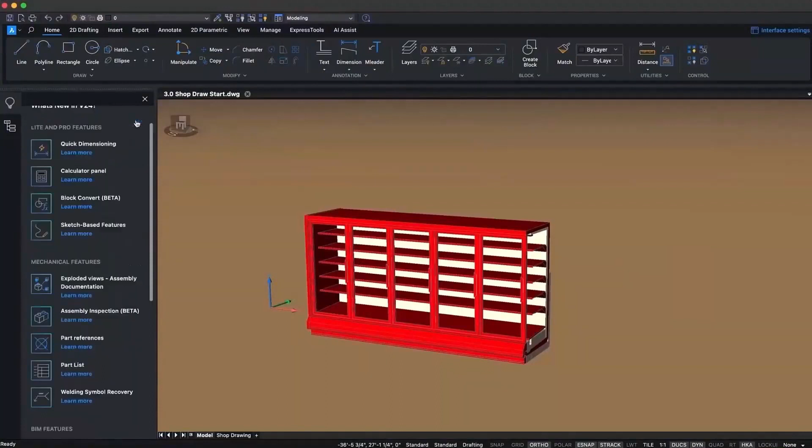The ribbon has been redesigned with the guidance of AI Assist, user data, and lots of feedback coming directly from you. It brings an improved, modern, and simplified look with more convenient icon spacing.

If you still can't find what you're looking for, you can just type it into the search bar and it will take you to the right location.

Now you're always in control of your drawing environment, so you can switch off the modern layout, refresh, and go back to the classic experience right here using the new interface settings dropdown. We also implemented a much requested quick calculator, which allows for fast and accurate maths calculations directly inside of BricsCAD.

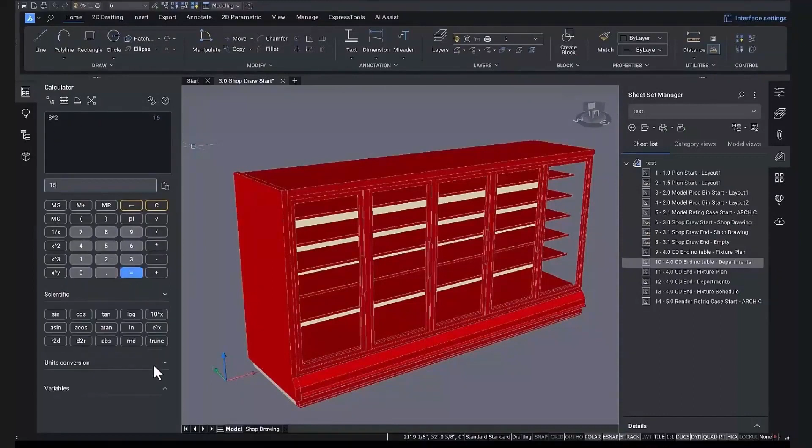We're so excited to see how these features and updates will make it easier for you to learn, use, and adopt BricsCAD. As you can see, we're working hard to make BricsCAD modern, simple, and easy to learn. Let's take a look at BricsCAD V24.

When you start BricsCAD, the launcher allows you to pick the workspace for the current task you want to perform. Let's open the drawing we're going to start with for our 2D floor plate layout.

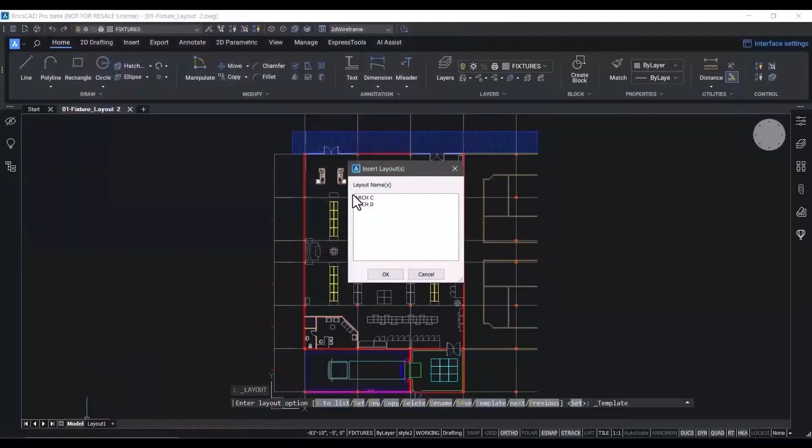As usual, you can select template files, apply them to your models and your layouts to ensure that your drawings meet your standards. New to V24 is the ability to directly create new drawings from a template from the start page.

Now, the BricsCAD Layout Manager also assists you in adding, removing, renaming layouts directly from that tab, and also has the ability to publish selected layouts using all of the output functionality of BricsCAD. You get very fast, one-click access to those tools.

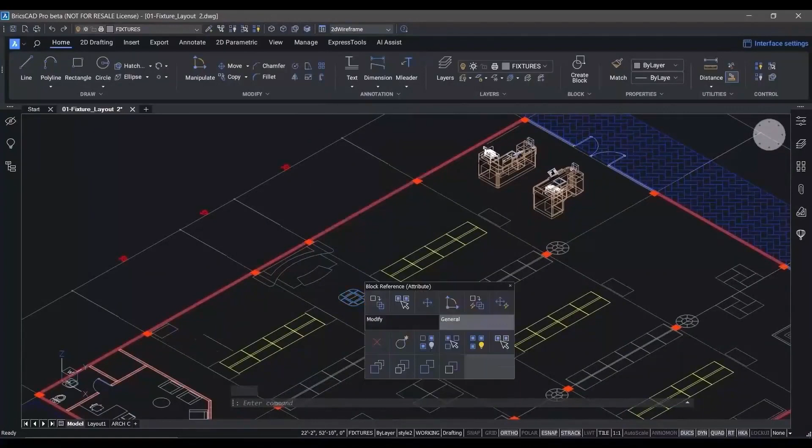Speaking of one-click, the ability to have the commands you need at the point of work without any typing, no ribbons, and no toolbars—that's the BricsCAD Quad Cursor. We've improved it greatly for V24. The Quad Cursor is context sensitive, so depending on the entities you hover over, the quad will display the requisite commands that can be used with those entities. Of course, at any time, you can always type a command in at the command prompt and use the muscle memory that you already have.

Speaking of commands that are, well, commandless, the manipulator allows you to select entities and move, copy, rotate, and mirror them directly with no command input. And the nearest distance command in BricsCAD accepts a typed-in dimension as an override to apply a move between any two entities.

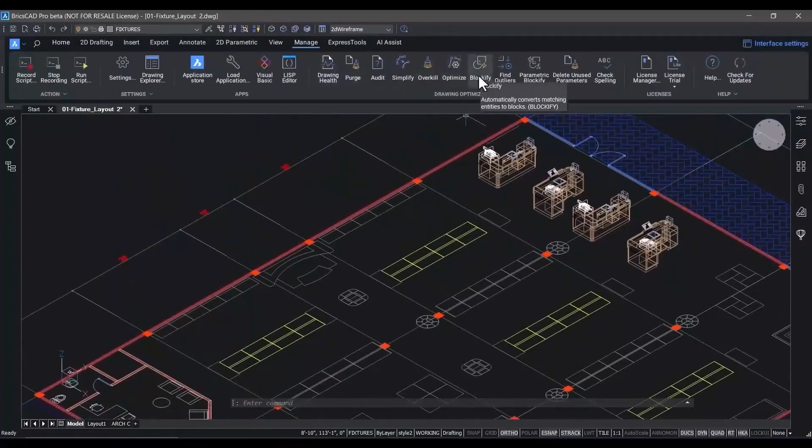Now, in the layout of the 2D floor plate, we used a combination of geometry and blocks. You probably know that blocks are the most effective and efficient ways to represent repetitive geometry in your drawings. But sometimes it's hard to remember where you created those, or to create them in the first place. The Blockify command in BricsCAD has undergone some great enhancements for V24. Here you see us using Blockify to match geometry with other similar geometry in the drawing, and it allows us to easily create blocks to represent that repetitive geometry. This reduces the size of our drawing files and makes it easier to load and work with those drawings in BricsCAD or any other CAD program.

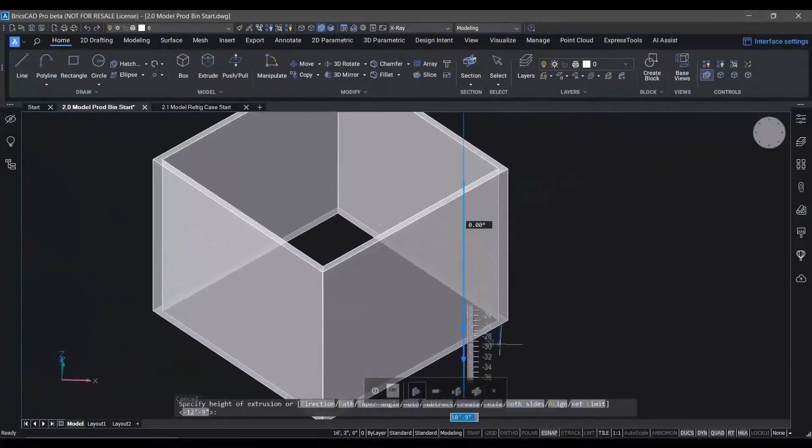Everything you learned about drawing in 2D can help you move to 3D with BricsCAD. Our unique direct modeling allows you to simply select faces and boundaries and then push and pull the geometry. All the 2D moves you know, from sketching through extruding and creating new geometry, are simpler in BricsCAD because it's one environment that lets you work in both workflows simultaneously.

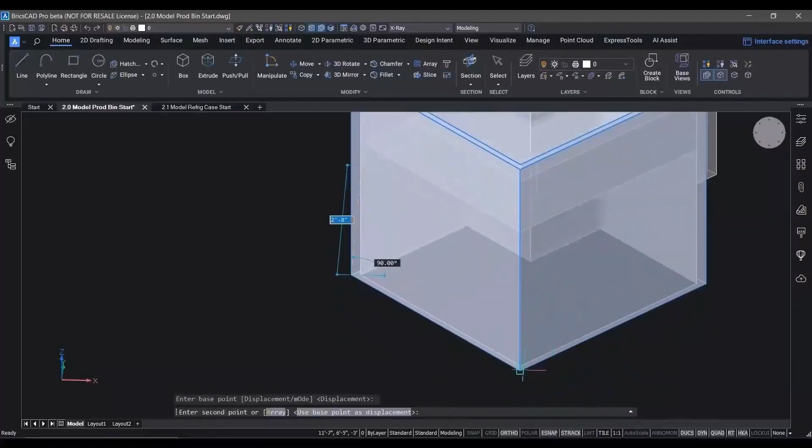We've created one example of this produce bin, which we're going to add into our library parts. Now we'll simply copy it to produce the quad bin that we're going to use in the final library component. Then we'll switch on some layers to show you the outer surroundings that we've created separately for this produce bin.

This same paradigm of using a sketch in 2D and then using it to create 3D geometry works for just about any shape you can imagine inside of BricsCAD. And here's the 3D representation of our 5-door refrigerator case for the store planning exercise.

Now that we've placed all of the 2D blocks in their proper orientation on the floor plate, we're going to use the block replace workflow within BricsCAD to simply swap them out for their 3D equivalents. If the 3D parts have been modeled and exist in your library, tools like Block Replace can help you move from 2D to 3D faster and more accurately. Once we have the 3D model, it's very easy to do visualizations and advanced calculations on the way things fit together within the space.

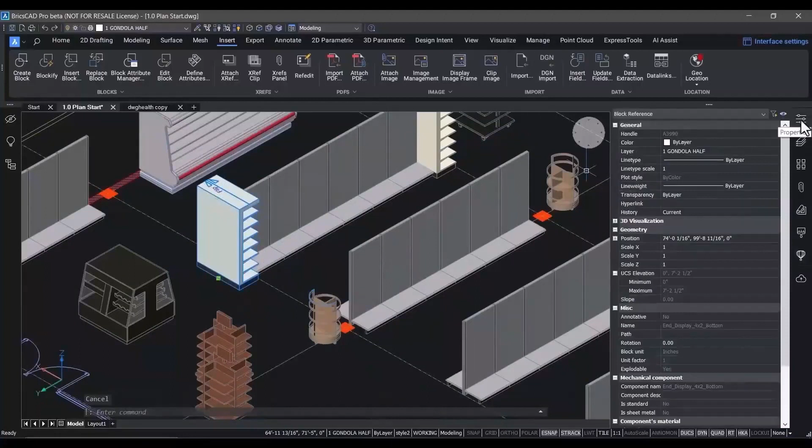Now we'll insert a parametric block created in BricsCAD directly from our library to place an end cap on the end of one of the shelving units. We're constantly improving BricsCAD parametric blocks, and there's a lot of great new features in V24. For one thing, it's more visual—do you see that flip line? You can see that a parametric block can contain a variety of different states that allow you to represent it as required in various drawings.

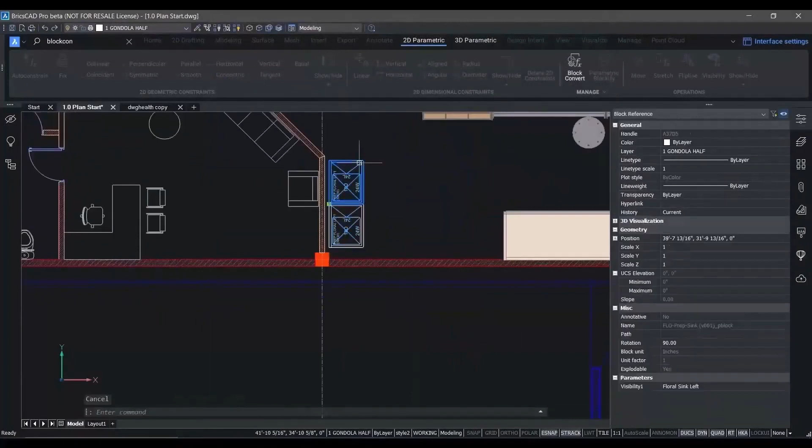Here are a series of dynamic blocks created in another CAD product. Whilst these blocks work perfectly in BricsCAD and can be used in all their iterations, they can't be edited. That's why we created Block Convert. In V24, we've consistently enhanced and refined Block Convert to accept dynamic blocks from other programs and immediately convert them into BricsCAD-style parametric blocks, so that you can edit them inside of BricsCAD's block editor. Here you can change the visibility states, cycle through all of the available parametric actions, and add and remove those parametric actions as you need from your blocks.

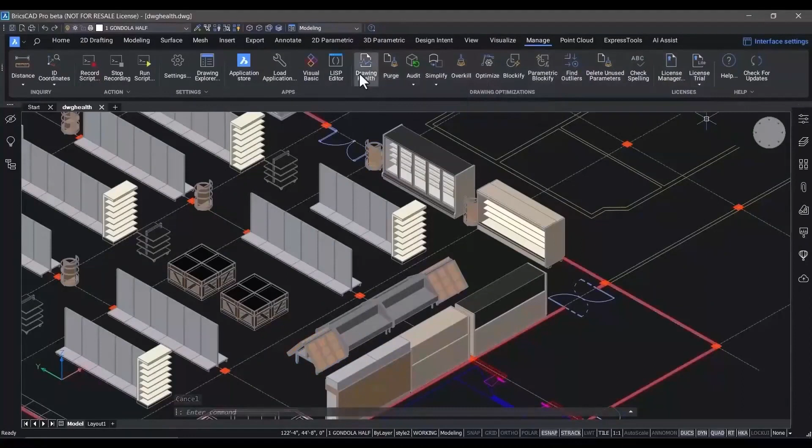You may find that even when blocks are included in libraries—for example, the produce bins we're working with here—we can see by hovering over them that the tooltip says an incorrect version of these blocks has been used. This is not a problem. The drawing health management workflow in BricsCAD has been improved again for V24. It now incorporates Overkill, which allows you to select geometry in the drawing that's duplicated and simplify it, or in our case, to select duplicate block definitions that have different names. This ensures you remain in control and gives you the ability to quickly rectify each of these insertion situations within a single operation. The drawing health tool is automated, not automatic.

You have full control over what gets modified. At the end of the drawing health run, the command generates a report to show you all the changes that have been made to the current drawing.

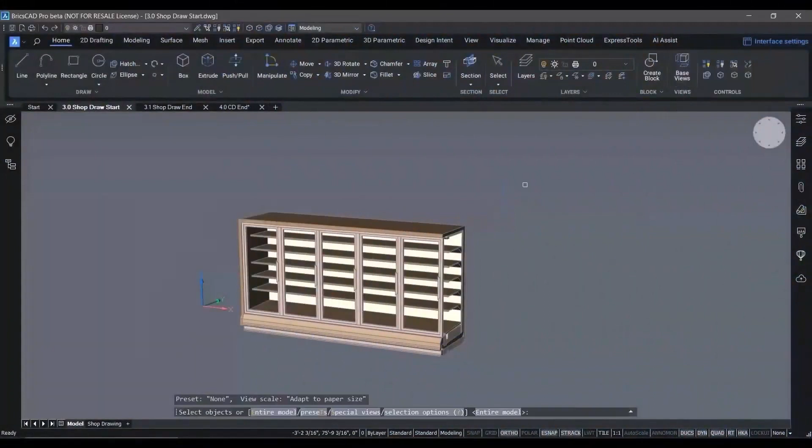Now let's start to lay out some drawing views of our 5-door refrigerator cabinet. We need some shop drawings that will be used to finish the assembly of these cabinets and prepare them for installation on the floor of the store.

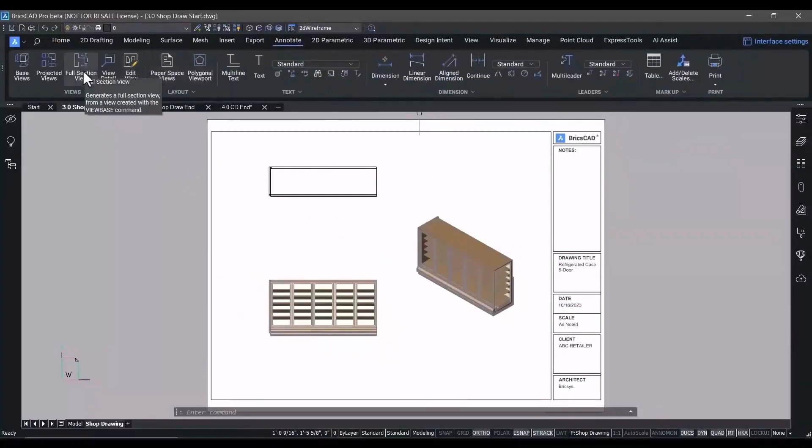We're going to use the ViewBase command to create our standard drawing views very quickly from that 3D geometry. We have full control over the way that each of those views are depicted in the Properties panel. Earlier you saw how easy it was to go from 2D to 3D. Now we're showing you how easy it is in BricsCAD to go from a 3D model to a 2D drawing that's fully associative to the model. When the model changes, the drawing will update too.

You have the ability to quickly create a section view and create circular or rectangular details just as easily. In V24, we've improved the performance of generated drawing views in BricsCAD to help you get the drawings you need out of your models faster, whilst maintaining the accuracy you need.

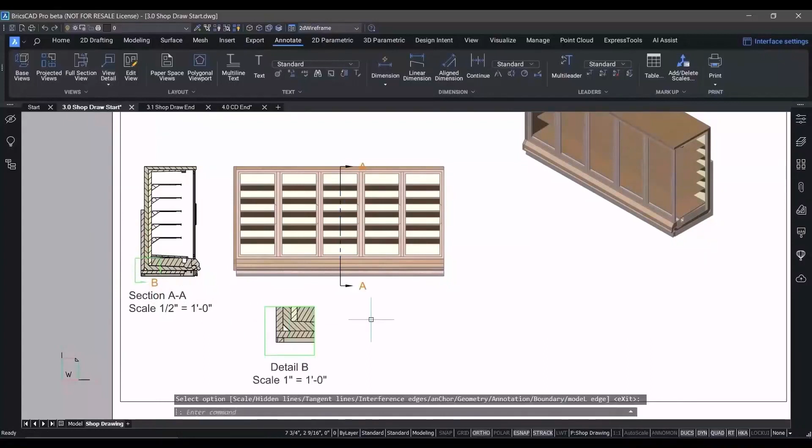Next, we want to add a parts list to this drawing to call out the various components of this refrigerated case. To do that, we'll use multi-leader entities to point to all the individual parts and pieces making up the equipment. We're going to use this drawing on the shop floor to help the team assemble this cabinet.

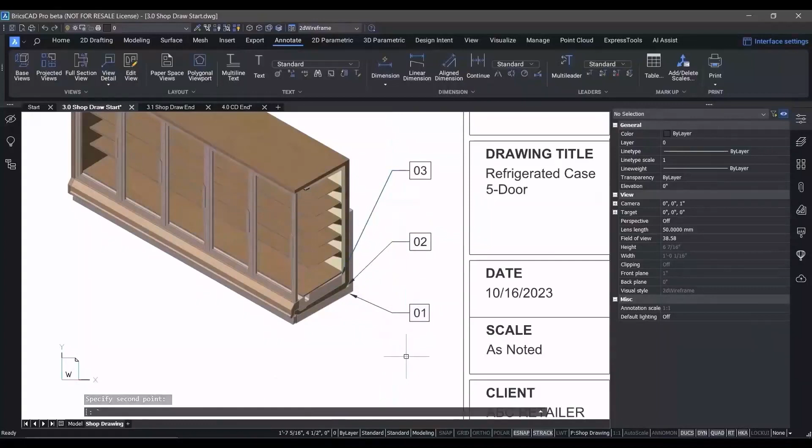You notice that we can select these multi-leaders and change the way they're depicted very easily from the Property panel in BricsCAD, with all the functionality and capability you'd expect from this common entity type. The multi-leader align command makes quick work of lining them up in our drawing. Now we'll close out the rest of that sequence and show you the rest of the multi-leaders in place.

Now we're going to import data in a table from Microsoft Excel. This is something that you've told us you do on a regular basis, so to make it easier for you, we've added Smart Cell copy and editing to BricsCAD V24. This is the ability to import an existing spreadsheet, create a table, and then easily modify and edit the table by adding, removing rows, and copying data between the rows and columns in that table.

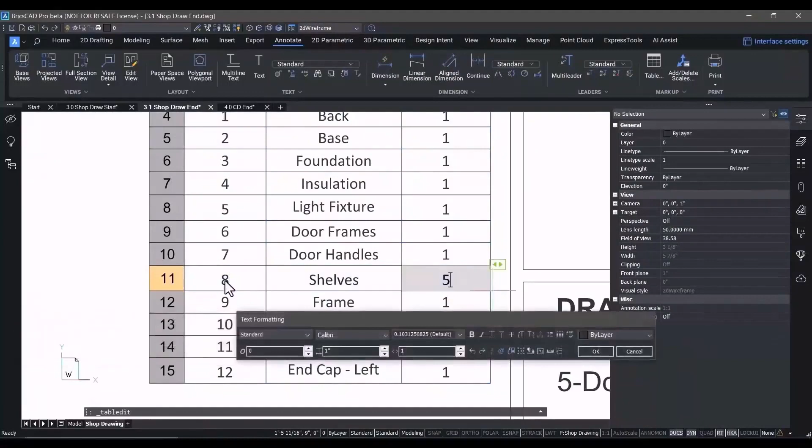These types of functional enhancements make it that much easier and quicker to deliver the documents you need to deliver in order to get work done and get paid.

You may have noticed that we added a row to our table. Let's add the requisite leaders here, but we want to point to all 5 shelves. So we'll simply use a multi-leader with multiple arrowheads to those 5 shelves. And voila, our shop drawing is generally complete.

Another thing you asked for is behavior that's consistent with other CAD applications. In BricsCAD V24, the trim and extend commands automatically highlight geometry to show you what your options look like. It's that easy. And once you've gone in and completed the geometry modifications, you can invoke a new command in V24, QDim.

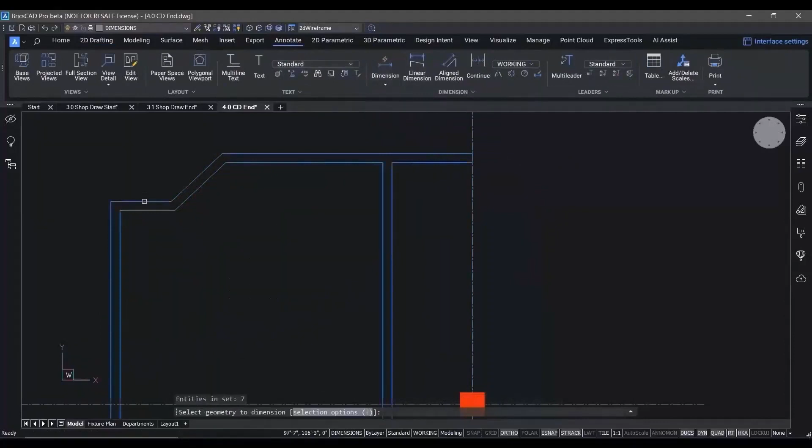QDim lets us place linear dimensions very quickly within a drawing. These dimensions are all easily modified to meet your standards and the placement requirements for individual drawings.

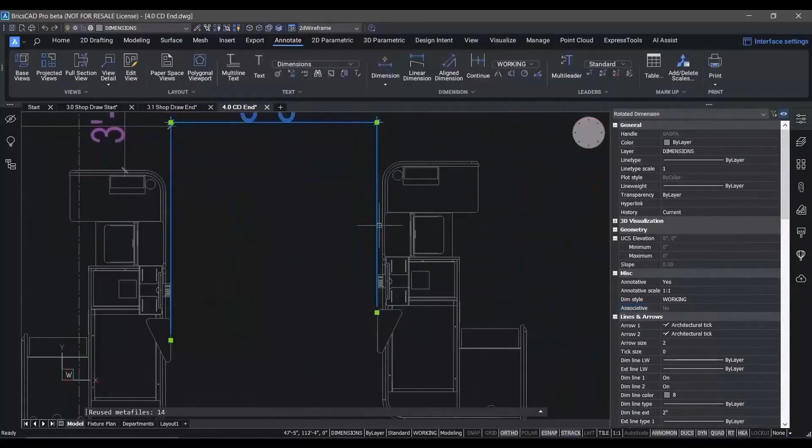Another area where we've improved the performance of BricsCAD V24 is around associative dimensions. The Anno Monitor system variable adds a small glyph that shows associative dimensions that have lost the connection to the geometry that defines them. So whenever the Anno Monitor flag comes on, we know that that particular dimension value doesn't match reality, and it allows us to modify the geometry or modify the dimension as required so that they're correctly shown.

In V24, we've also completely revamped the BricsCAD Sheet Set Manager, including new multi-user access to DST files. We have a new Model View tab that allows us to extract model views from any drawing and paste them into a layout really easily.

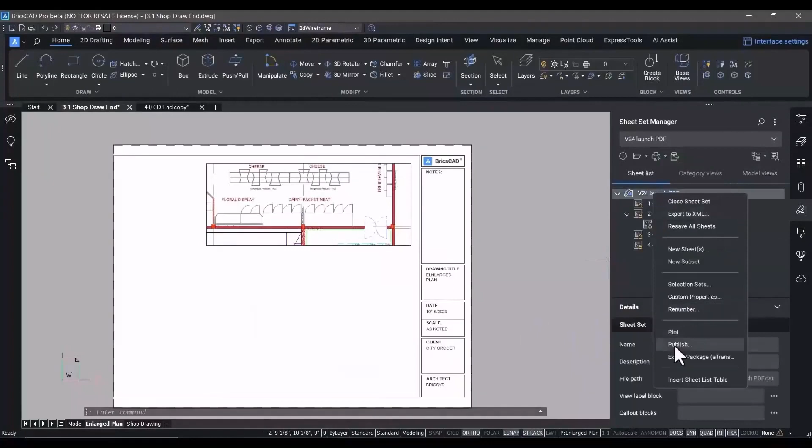Once we've done this, you'll see that we also have the ability in the new Sheet Set Manager to publish directly from the sheet set, which gives us the ability to quickly create, in this case, PDFs, including, and this is new to V24, bookmarks in those PDFs so that it's easy for you to hyperlink to the individual sheets in the PDF file.

Another user request was the ability to output standard raster file types with full control over size and DPI. Now in BricsCAD V24, this is directly available in the print and publish dialogues. As you can see, we can quickly generate raster file output for whatever type of documentation needs you have.

And that's just the start of what's new in BricsCAD V24. At Bricsys, we work every day to deliver a familiar and compatible CAD experience, build innovative ways to help you get your work done faster, and to build a modern and accessible user interface and user experience for everyone.

Want to see more about BricsCAD V24? Watch these breakout sessions, including a session on our unique drawing health management workflow and the new BricsCAD parametric block workflow with Block Convert, which has been greatly enhanced for the V24 release. We're super excited for you to find out more about our products.

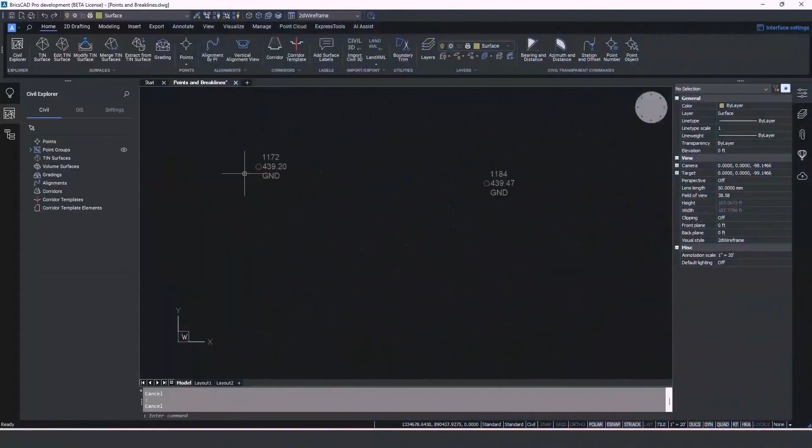First, we'll show you a few of the highlights of our TIN surface creation and editing capabilities. BricsCAD V24 has made working with TIN surfaces easier than ever, with a UI that's more intuitive and easy to learn. You can select the group of survey points and create a TIN quickly and efficiently, and maintain visibility into how that TIN was created.

You can edit parameters such as edge length so that your TIN is as accurate and efficient as possible. You can use the new transparent commands to enter data in common civil survey formats, using this to do, for example, break line data, whether this is specifying civil point numbers or snapping to any part of a point object.

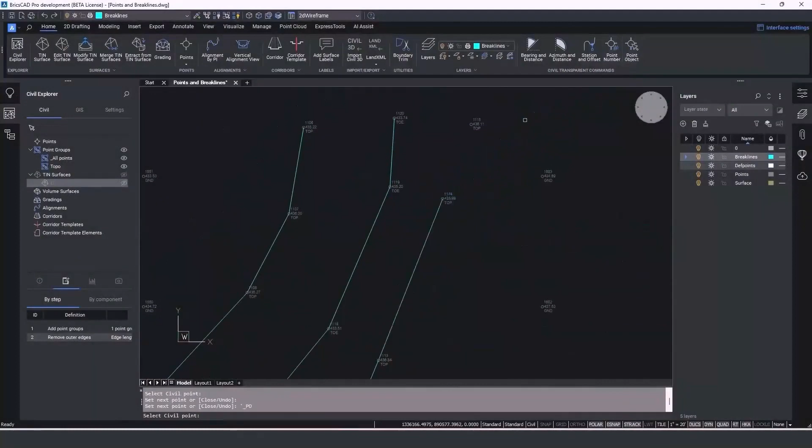Once your break lines are created, adding this data is quick and easy, with immediate surface updating, and the ability to use the Properties panel to update any civil points that may be incorrect.

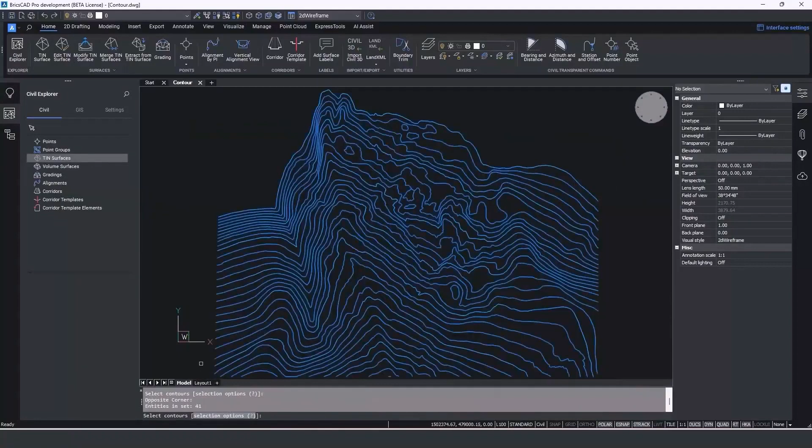At times, contour data is the only data you have available from which to build your tin surface. As a result of user requests, in BricsCAD V24, we've added the ability to create tin directly from contours, instead of treating the contours as break lines. This allows us to minimize flat areas typically created by contour data and greatly increases the accuracy of the tin surface.

You have the option to add supplemental vertices to ensure that curves are maintained, or weed out vertices from over-digitized data. You also have the option to remove outer edges.

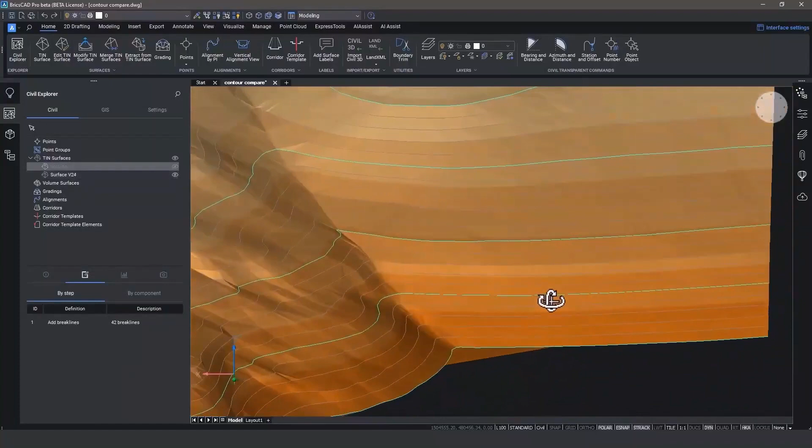If we look at a surface that treats contour data as break lines, you can see quite easily the difference in accuracy of the tin created from the same data. But using our new contour data option, it minimizes the flat areas and makes a more accurate tin. So even if contour data isn't the most desirable data for tin surface creation, V24 makes it possible for you to create a better, more accurate, and efficient tin from it anyway.

Next, we'll show you the new GIS workflow, allowing you to manage and create GIS data in BricsCAD and round-trip it to other GIS systems.

In response to user feedback and requests, BricsCAD V24 has built on the GIS import function and now makes it possible to round-trip GIS data.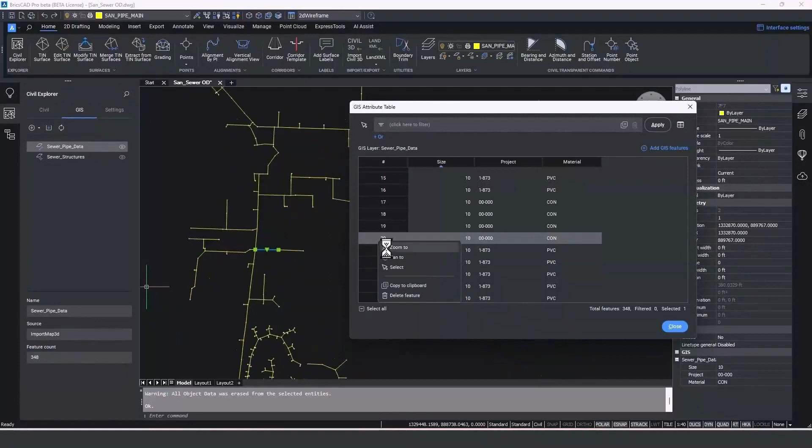BricsCAD V24 can read object data from AutoCAD Map or Civil 3D files and import that into an attribute table. Attributes and records can be selected in the table with the ability to zoom to items or zoom to the table line for an item.

Filter objects based on attribute data, which allows you to quickly find the objects you need and then add to your filters to further refine your data searches.

We've built on the import GIS data function, and now you can create and edit objects using familiar CAD commands, as well as the new transparent civil commands that enable you to enter data in common civil survey formats, including bearing and distance. From there, you can add GIS attribute data directly to the existing table.

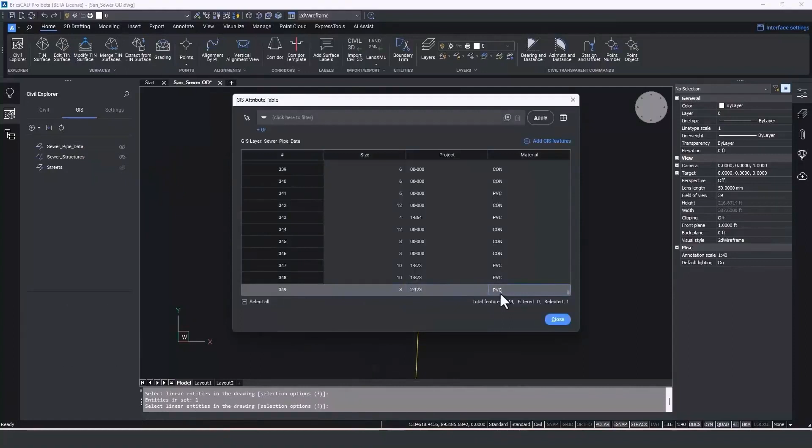Also new to V24 is the ability to create GIS layers from scratch. Specify the name, geometry type, and attribute data, then draw objects using your favorite CAD commands and add them to the new GIS layer along with any attribute data.

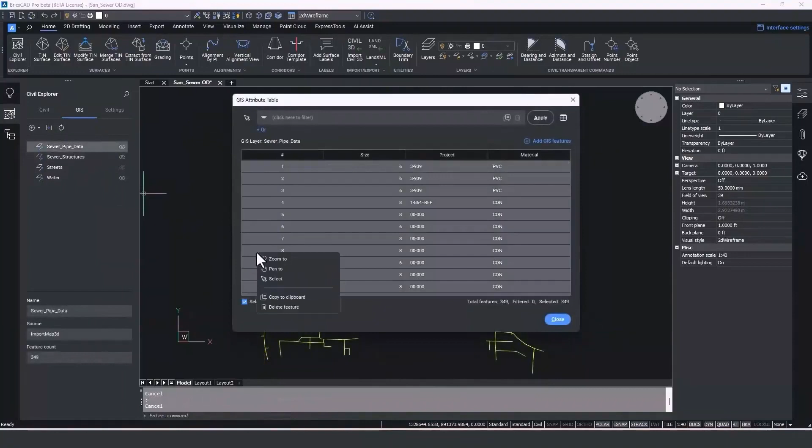When you need to share your data with stakeholders, simply select what you want to share and export it to a shapefile. This V24 functionality ensures you're able to fully participate in GIS data workflows, all within your favorite CAD environment.

As I mentioned earlier, we've been adding new civil and survey functionality to BricsCAD Pro since version 19. This year, with the launch of V24 and over 5 years of improvements and innovation, we have a compelling set of tools for civil and survey users to help you get your projects done faster.

We've continued to improve our surface technology to create industry-leading surfaces that are accurate and lightweight, a cornerstone for workflows such as grading and site design. We've added greater levels of interoperability with our new round-trip GIS workflow. And there's also so much more.

Be sure to check out our civil and survey breakout sessions for an in-depth look at some of these new features. We have 3 sessions on working with TIN surfaces in BricsCAD, 2 on site grading in BricsCAD, as well as demos on the new transparent commands, leveraging GIS data, and highlights from some of the applications from our partner developers.

To learn more, we invite you to visit us online to find more detailed information or contact one of our local experts to get a personalized demonstration.

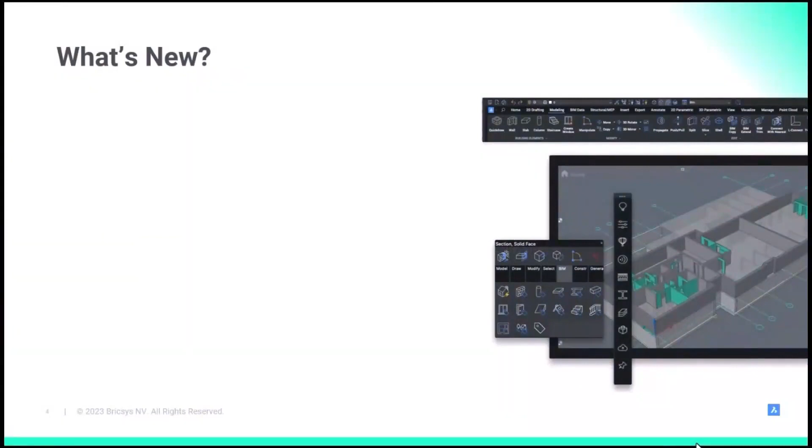Our new features in V24 have been driven by 3 essential workflows that were mentioned by the majority of our users. Those essential workflows are 2D to 3D, data exchange for collaboration, and scan to BIM.

So in V24, going from 2D to 3D BIM, we made it not only easier, but also familiar. We made it even better when it comes to exchanging data, and we made it quicker and easier when it comes to scan to BIM. We believe this will not only help our customers, but anyone who needs to do the same type of work, but whose current CAD solution just cannot do the job for them.

Now, I will show you how these three workflows influence our new features.

Starting with the first use case. So what we heard often from users like general contractors is that they're still receiving 2D from designers for at least 40 to 50% of their projects. So they have to convert this 2D into 3D and BIM models for coordination, visualization, planning, and quantity takeoff.

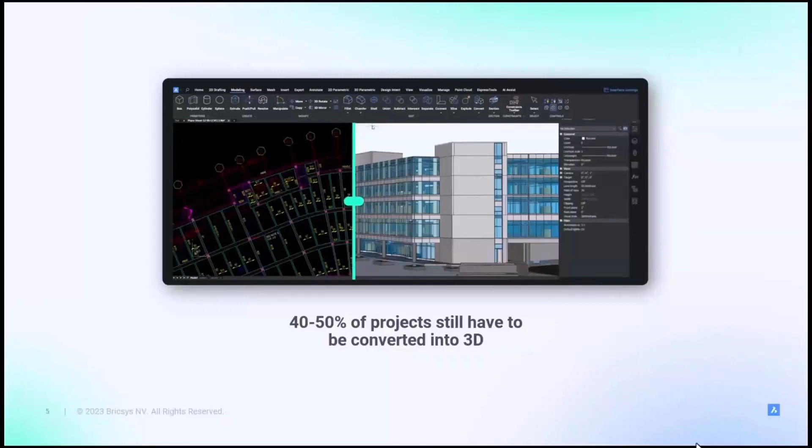This effort to create accurate 3D or BIM models can be overwhelming for some companies, especially when you factor in the cost of the software and training. In V24, we created building modeling tools that are simple to use, familiar, and smart when needed, all possible in one CAD software. Now let's show you these tools in action.

BricsCAD BIM V24 makes it simpler than ever to create BIM models. We've packed in smart tools and unique functionality that gives you the productivity gains you need, whilst eliminating the complexity that you don't need. When creating walls from a 2D layout, you're not only able to trace lines and define parameters from your own material library, you're also able to automatically generate walls of the correct thickness, no matter whether you're working from 2D layouts or point cloud data.

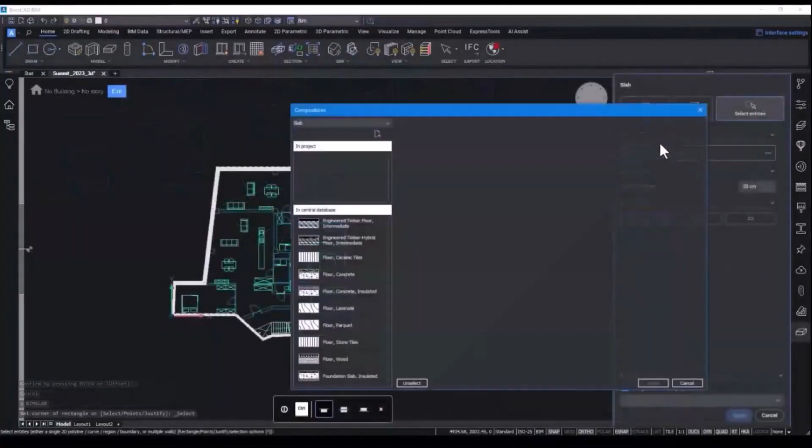The slab tool gives you the advantage of converting boundaries into a floor slab. Simply select the walls you want to use, along with any offsets or contours, and let BricsCAD do the hard work. You're also able to use a 2D layout to place columns, even if they're not a square shape. The Boundary Detect identifies it for you and places them automatically.

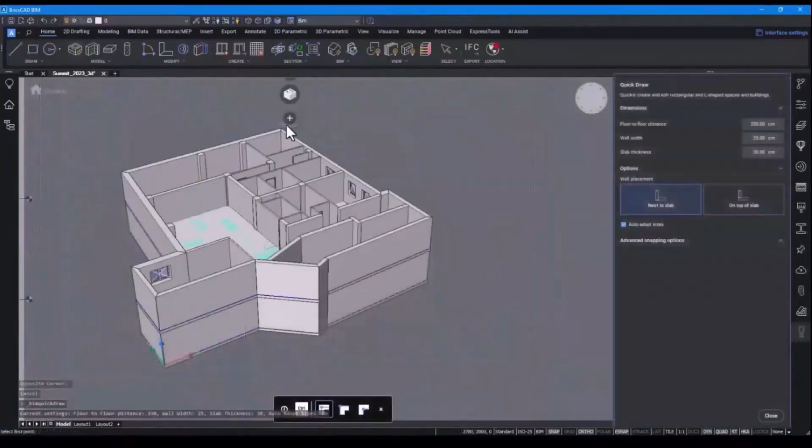Interior walls are just as easy. Pick a composition and use the 2D layout to trace walls, with BricsCAD automatically detecting the thickness. From there, use smart tools to connect walls together or extend to external walls. Once the initial floor layout is done, then you have the option of using the Quick Draw tool to copy the layout to other stories.

Also, we've answered user requests for simple roof shapes, now giving you the option to create basic roof shapes. All of these tools will help you move from 2D to 3D in less time and without a steep learning curve.

That brings me to the second use case. Most of our users choose us because they want to adopt OpenBIM for the use of BIM coordination and collaboration. We hear this from general contractors as well as from structural engineers. OpenBIM provides big advantages, for example allowing different software to communicate and exchange data seamlessly, reducing error or rework. This means you have the ability to future-proof your business by being able to participate in multiple BIM workflows.

But collaborating is still challenging due to the high use of closed platforms, which can cause data loss. With BricsCAD BIM V24, we've added even better tools for IFC classification and data exchange with all BIM formats, including Revit. As you will see in the demo, the BricsCAD BIM approach dramatically improves collaboration without any increase in complexity. Do note that this new Revit export is for visualization and not meant for editing inside Revit. We do plan to continue developing this further as we continue to hear your feedback.

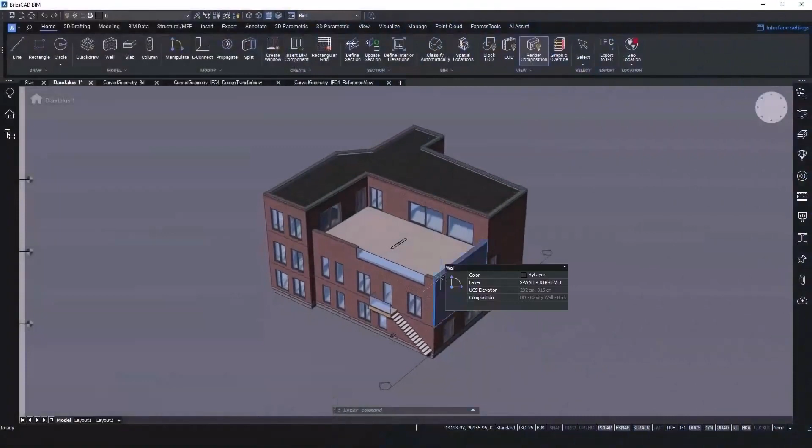Now, let's check out the new features. We know how important it is to be able to collaborate with ease and confidence, so BricsCAD BIM V24 has enhanced and added functionality to make that happen. We've enhanced the functionality of existing IFC interoperability by adding tools to ensure IFC quality and flexibility.

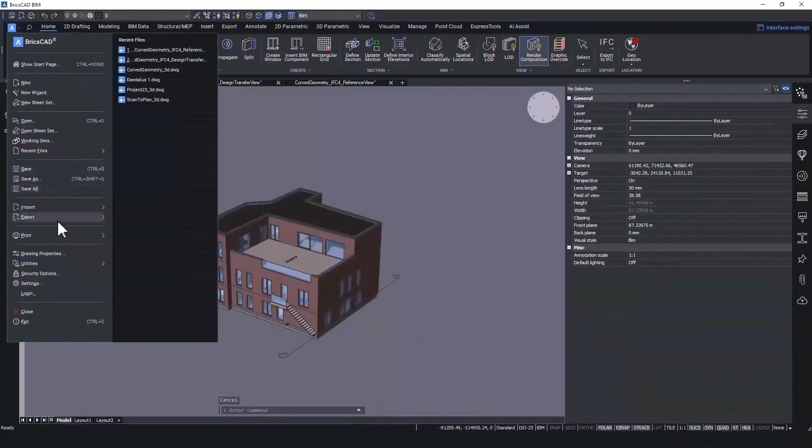The IFC reference view now allows you to export geometry as a reference or underlay for use in Revit, enabling you to make a simplified version of the model, which is readable by more programs. There's now a unified IFC namespace, which means that you can specify IFC BIM properties without worrying about which version of IFC you want to use. Simply add your BIM properties, and when it comes to exporting, BricsCAD does all the necessary mapping behind the scenes. One less thing for you to worry about.

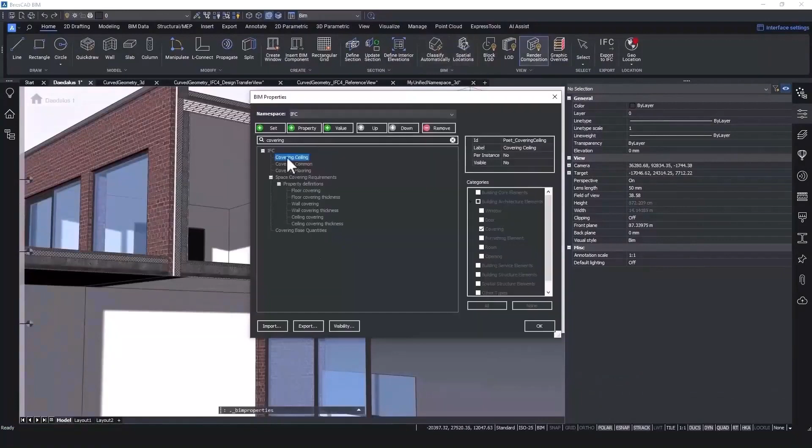A new tool to validate IFC has also been included. This enables you to import data from stakeholders whilst being aware of any issues that may be associated with the file. And smart visibility rules on IFC properties mean that it's easier and quicker for you to classify and verify objects based on IFC4 schemas. If IFC isn't enough, we've responded to the need for proprietary output with Revit Export.

The BIM interoperability story is ongoing for us, and we strive to make it easier to exchange models and data with confidence.

Last but not least, that brings me to the third use case: scanning buildings for renovation, retrofit assessment, quality, and as-built documentation is becoming more and more popular. We all know that the effort to convert the raw scan into a usable model can become too time-consuming to see any benefit. As part of our innovative vision to have the software carry the load, BricsCAD BIM V24 has added new functionalities to our automatic scan to plan to BIM capabilities.

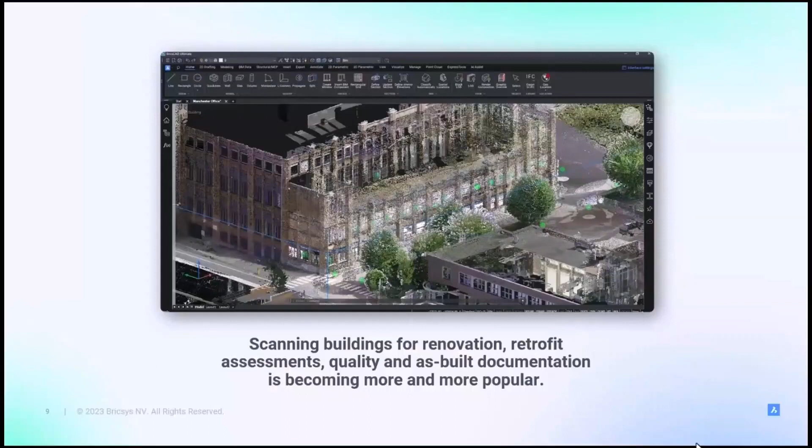Do note that this is one of the two workflows we support. The second workflow is the more conventional workflow. Now, enough of me talking, let's just jump into the demo.

BricsCAD BIM V24 makes navigating point clouds quicker and easier by making better sense of your data. As well as existing functionality to isolate sections of a point cloud, there's now the ability to classify point cloud data right within BricsCAD BIM. This means you can use the point cloud manager to switch various classes on or off, making it easier to concentrate on the data you need for a project. Just need walls and floors, click, click, and you're done.

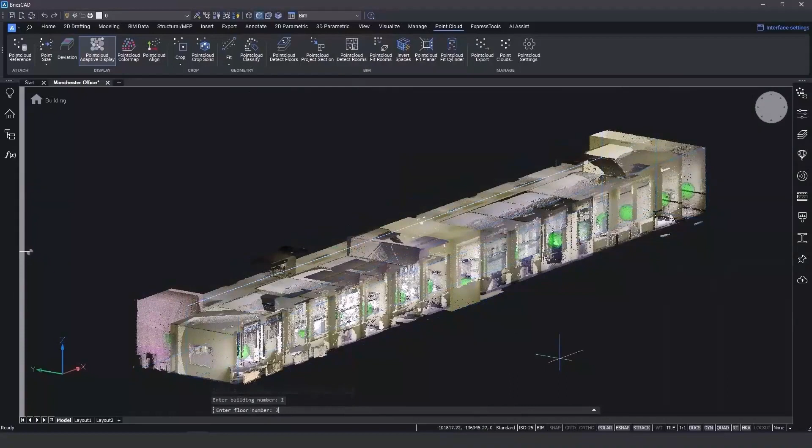We're continuing to build on our scan to BIM vision, and we've improved our detection tools by giving you the ability to detect rooms from the point cloud and classify these rooms at the same time. After specifying the building and floor number, BricsCAD BIM identifies rooms and displays them in the point cloud manager panel. But you're always in control—select rooms and merge them and rename them if you need to.

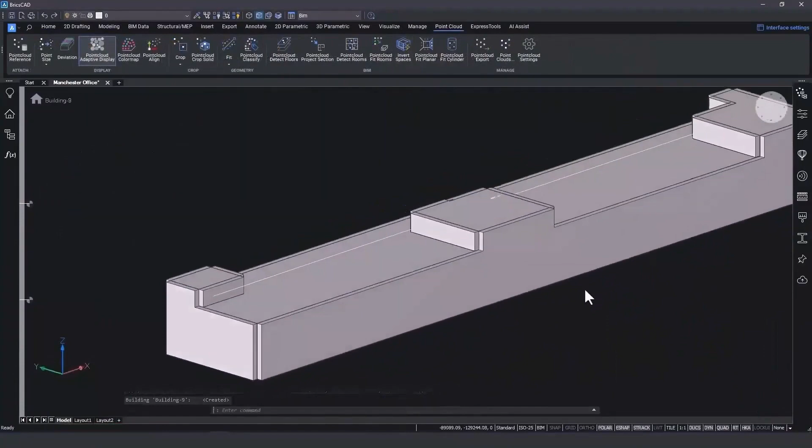Once the point cloud has been properly classified into classes and rooms, you can start using smart modeling tools to create geometry and classify the results of these as BIM spaces. You can go from point cloud to geometry in 2 clicks. In V24, we've continued our mission to go from point cloud to BIM, and we'll keep bringing you tools that help you do this quicker, more easily, and more accurately.

Okay, this is a wrap up for me. Just a short recap: in this release, we made it familiar and easy as possible to go from 2D to 3D. We created new data exchange benefits with our open platform and showed the big advancements we made on automating the scan to BIM workflow. I hope you notice how BricsCAD BIM V24 shows our continuous commitment to push the boundaries of CAD with our 3D, BIM, and point cloud tools, and that we continue to make new technology accessible to our users and are not afraid to take on innovation.

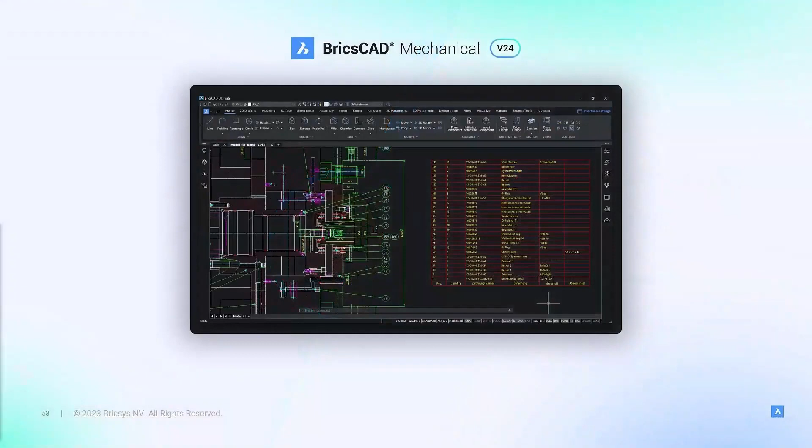Hello, I'm Cliff Brown, Executive Product Manager for BricsCAD Mechanical. BricsCAD Mechanical V24 provides manufacturers of any size with the fastest path from concept design to production drawings.

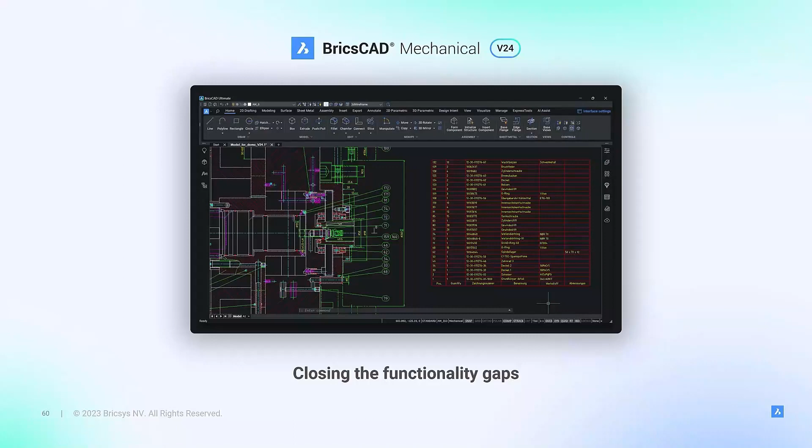Last year, with our V23 release, we delivered the most requested 2D mechanical CAD features. That meant covering all the basics, such as symbols and annotation, power dimensioning, and the ability to edit symbols found in existing DWG files. With BricsCAD Mechanical V24, we've turned our attention to the cost savings and software deployment goals of our clients. More specifically, we've focused on helping manufacturers migrate from AutoCAD and other 2D design and drafting software so that they can leverage the BricsCAD cost-saving advantages by closing the functionality gaps between AutoCAD and BricsCAD Mechanical.

And to help manufacturers accelerate the time to deliver production materials, by providing non-3D experts with the ability to reuse existing 3D models for technical publications and design for manufacturability studies. In this new update, we've done the extra things needed to provide our clients with a complete 2D design and drafting toolset that is familiar and compatible with the software you're using today.

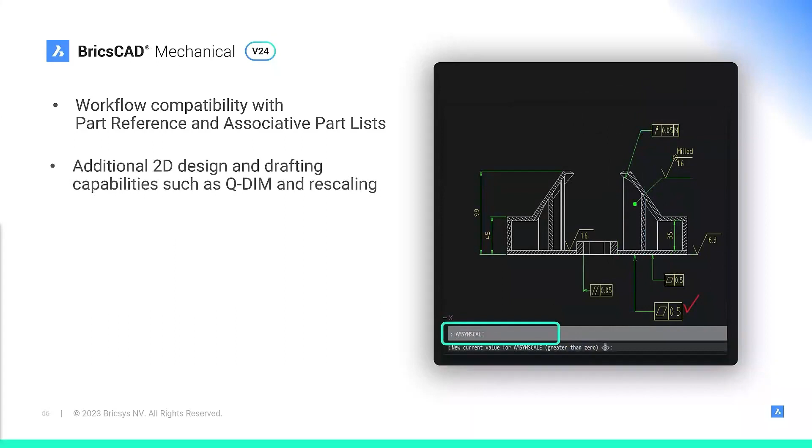The new V24 capabilities include additional part reference and part list creation and editing utilities, a suite of usability updates such as QDIMs and rescaling for text, dimensions, and annotations. The feedback we've received during our summer beta program helped validate that BricsCAD Mechanical V24 closes the key functionality and interoperability gaps highlighted by our clients. With this release, we're eliminating the risk of migrating from legacy 2D CAD software to BricsCAD Mechanical.

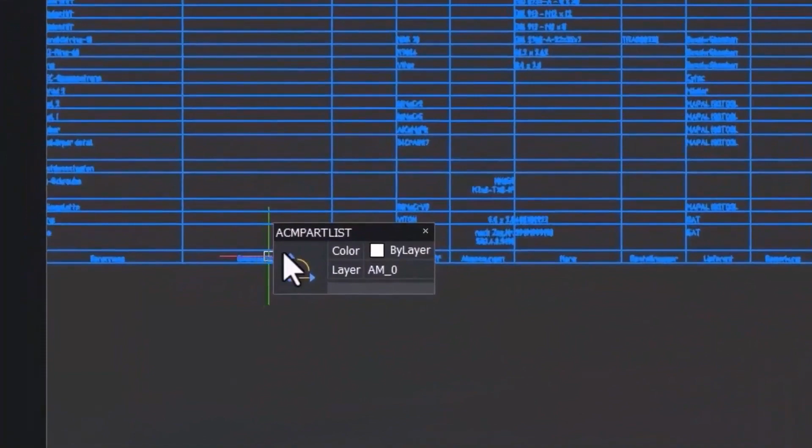Let's take a quick look at these new 2D design and drafting capabilities. We recently helped a manufacturing company make the move from AutoCAD Mechanical to BricsCAD Mechanical. As part of the migration, the client validated the ability to open existing DWG files in BricsCAD Mechanical with no loss of vital part reference or part list data.

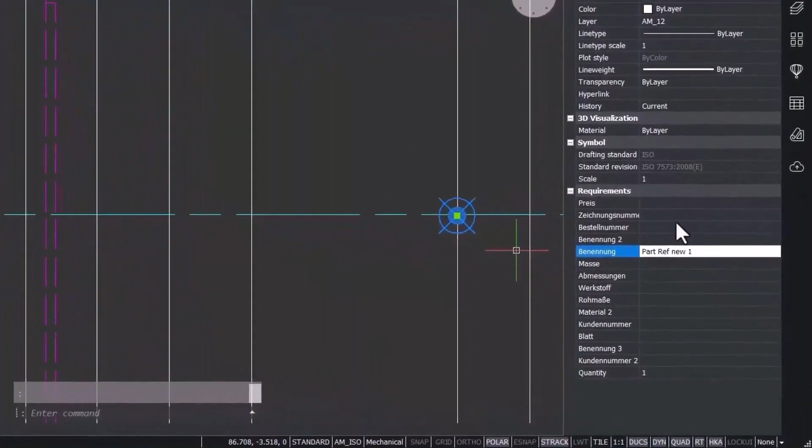In BricsCAD Mechanical, we can create a part reference using the AMPartRef command. Now we can give the part reference properties via the Properties panel. The specific properties were predefined in the DWG file. Here we add the part name and the part number, and you see it appear here in the part list.

New projects often start by editing existing drawings. The ability to leverage legacy DWG files saves time and money. With BricsCAD Mechanical V24, we've made interoperability even more seamless. In this example, the goal is to enhance the performance of an existing actuator assembly design by adding a custom gasket. First, we'll utilize BricsCAD Mechanical's powerful 2D design capabilities to quickly update the model.

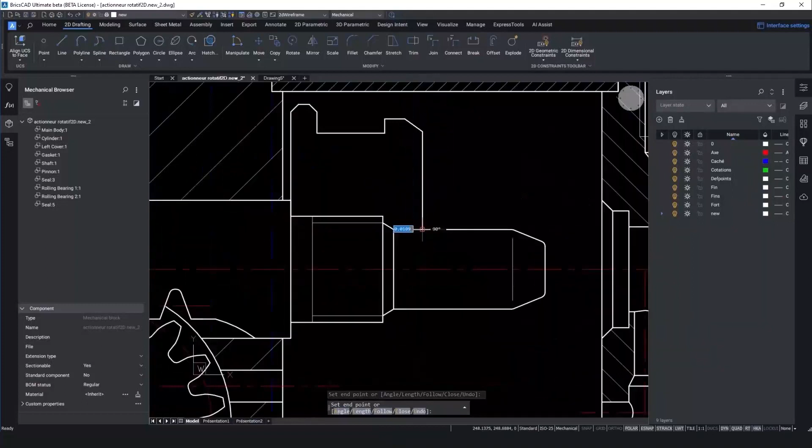The quad, shown here, is a unique feature to BricsCAD that speeds up your CAD workflow by putting your most used and needed commands right under your cursor.

Here in the quad, we are using the Join tool to join the polylines used to draw the gasket and create one object.

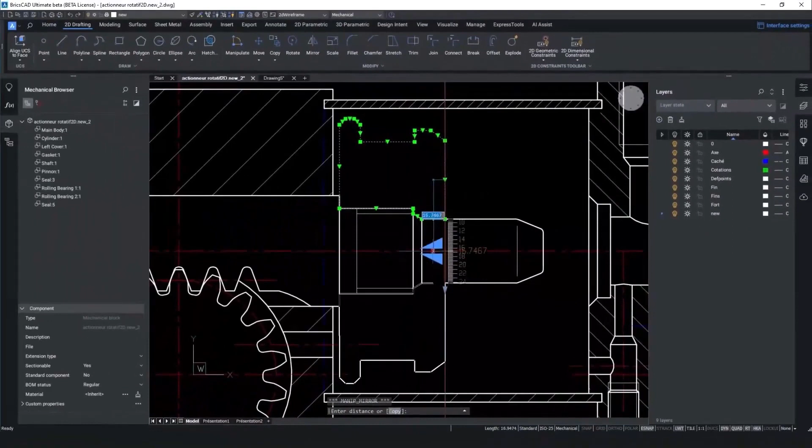The manipulator is a visual tool to give users dynamic movement, rotation, mirroring, and scaling of selected geometry without any command input. As the gasket is identical on both sides of the piston, we can use the mirror feature of the manipulator to save time and ensure accuracy.

The gasket now needs to be turned into a mechanical component so that we can assign properties to it later. The BM form command creates a new mechanical component as an internal reference in the current drawing.

To optimize the design process, we'll use the intelligent Copy Guided tools to copy blocks from one place in the drawing into another. Copy Guided automatically aligns copied entities with relevant geometry using temporary guide curves. Polyline segments and multi-line segments are also accepted as guidelines.

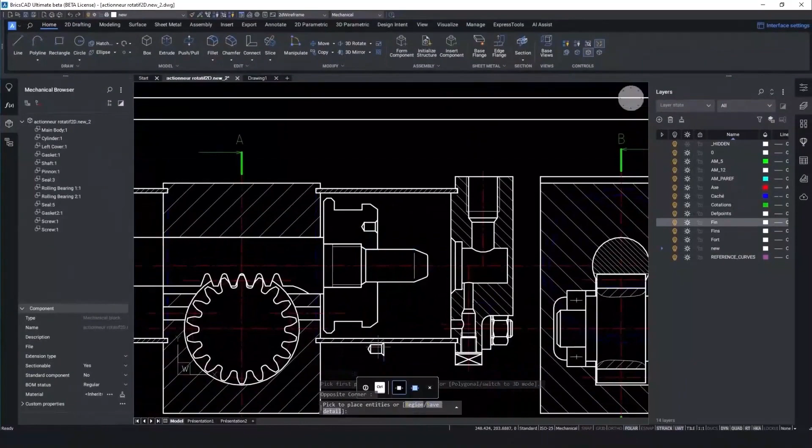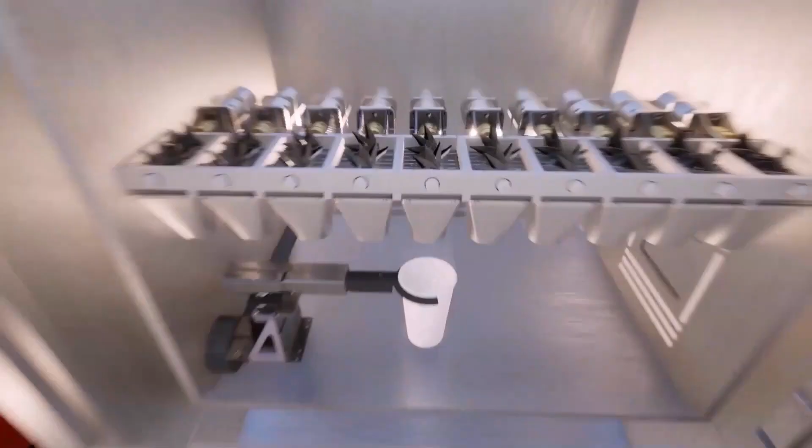BricsCAD Mechanical is part of an all-in-one environment for design and production professionals. Everything from the building model, to the break room, to the beverage machine and crusher assembly provided by our client, Alberts, can be integrated and explored.

Let's take a quick look at the tools in BricsCAD Mechanical V24 that help designers convert 3D models into complete and accurate production materials. Assembly technicians require a package of materials to effectively complete their job.

The process of creating these materials requires multiple different personnel, from engineers to illustrators. We're going to walk through how the BricsCAD Mechanical platform ensured our partner, Alberts, could generate these materials for their smoothie making vending machine, all in one single platform.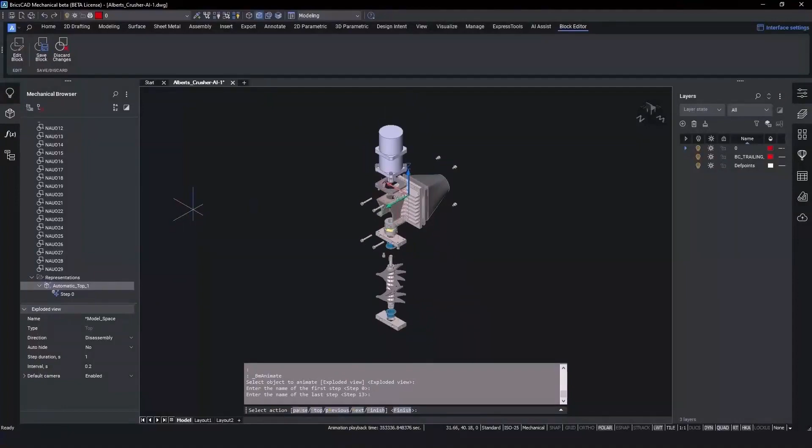Let's take a look at the materials they required. Here is the 3D assembly model of the crusher device found in Albert's smoothie machine. This 3D model needs to be turned into drawings which can pass to production.

Component production drawings allow the assembly technician to reference the drawing against the actual component to check for any deviation from the specifications supplied for manufacture.

General arrangement drawings give a visualization of what the final product will look like. It also details high-level dimensions, component locations in the assembly, and a parts list or BOM for the assembly with balloon annotations. It can be thought of as a visual table of contents for the products.

The exploded view drawing of the assembly is a high-level overview of how the components come together, different from the general arrangement, which only shows their final position in the assembly. These drawings will have trailing lines which give an indication of how the components interact to create the final product.

The assembly manual is a detailed sequential step-by-step guide on how the product is assembled. There is a great depth of detail in the manual outlining when and how the components are put together. Each step will have assembly notes as well as a pictorial graphic generated using the CAD model.

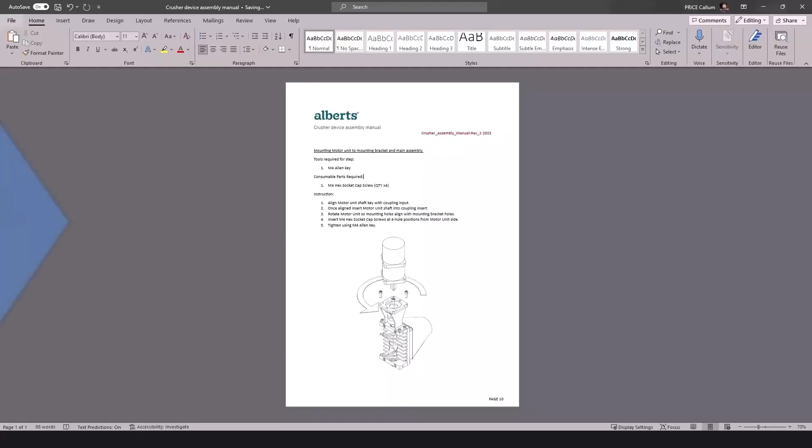Now we know what materials are required for an assembly technician to effectively complete their job. Let's look at how BricsCAD Mechanical can assist you in making these materials.

As the assembly manual details each step in the assembly process, we can add particular details to each step on the 3D model, like this 3D arrow annotation. This 3D arrow will only appear on the specific step selected.

Next, we'll add a 3D model of a tool to make clear to the assembly technician that this step will require a tool. We can even add text in the 3D model space of a particular step. This allows for a great deal of detail to be communicated in each step of the process.

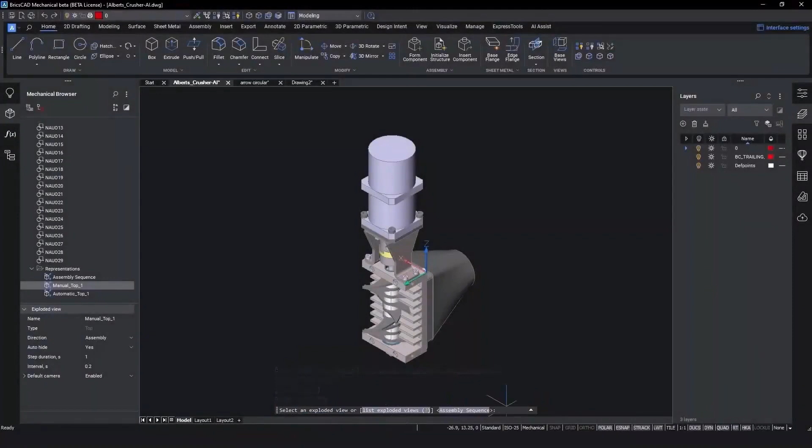We can now export the sequence of steps to SVG format, complete with all annotations. Each step in the sequence will have its own SVG file.

From the assembly manual document, it's just a case of importing the SVG step required for the step in the manual.

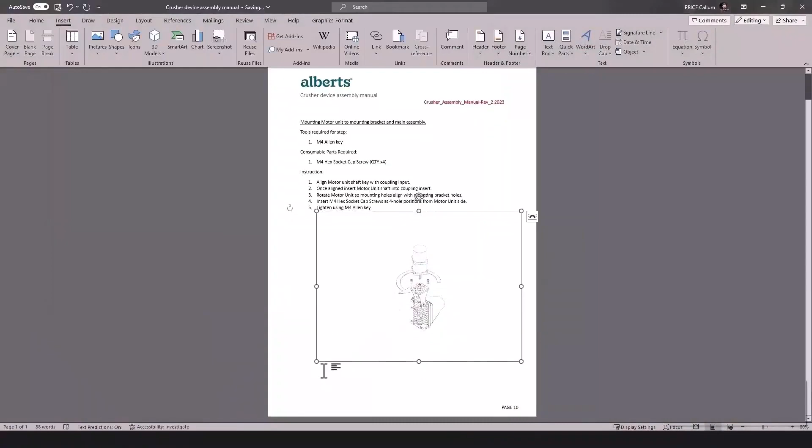To recap, assembly technicians need a pack of drawings to effectively complete their jobs. We've shown that with BricsCAD Mechanical, it's possible to generate a component drawing, a general arrangement drawing, an exploded view drawing, and graphics for an assembly manual, all in one platform.

Manuals are great, but how do you know that the instructions produced are the best option for your assembly or maintenance process? With V24, we provided a prototype of our evolving suite of manufacturing producibility validation, or design for manufacturability and assembly tools.

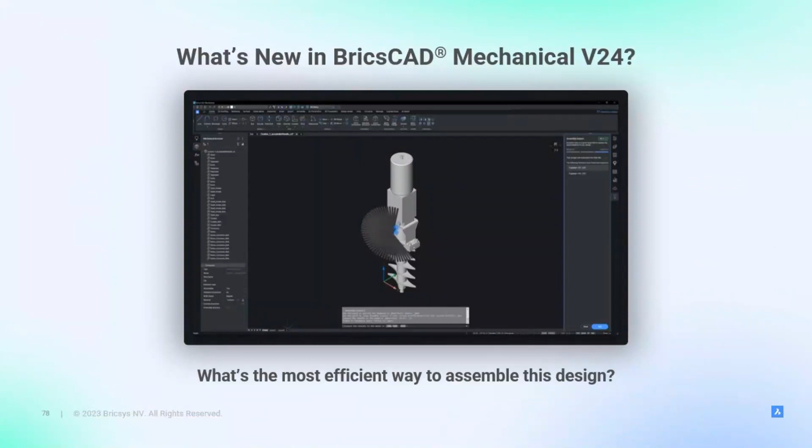With these capabilities, users can simply set up the analysis rules and then ask the software to inspect the assembly steps. Our partner Alberts recently used our new assembly inspection tool to create a use case study of tool usage on their product, a crusher assembly which is part of a smoothie machine. This allows for optimized detailed assembly notes and instructions to be created, or potentially highlight an area where redesign is required to suit assembly efficiency. With BricsCAD Mechanical V24, manufacturers like Alberts can optimize the design so that an assembly technician can effectively and efficiently assemble a product. Let's take a walk through and look at the assembly inspection tool.

To start the assembly validation process in BricsCAD, we first need an as-built sequence, which mirrors the order in which the components are assembled in the real world. This sequence can also be used in creating assembly instruction documentation. The assembly inspect command initiates the inspection tool process. Select the newly created as-built sequence in the assembly inspection dialog and verify the steps match the build order. In the Configuration tab, select the 3D model of the tool required in the assembly process, and map this to the components it's used on.

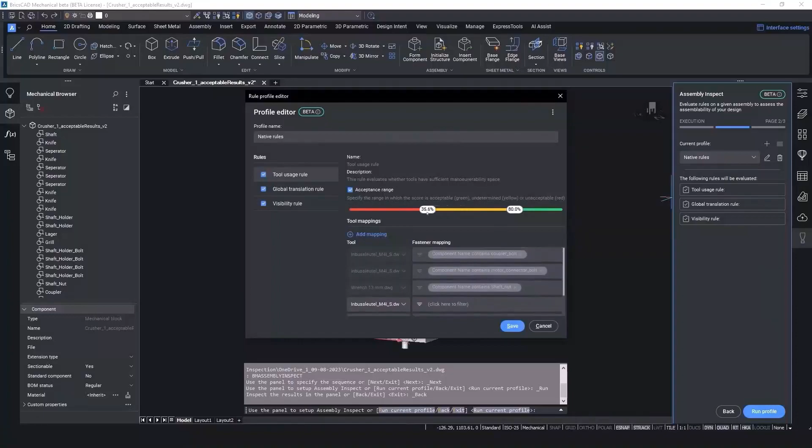The next step in the process allows rules and parameters being checked on the assembly to be configured. There are 3 parameters which can be selected: tool usage, global translation, and visibility. With all parameters configured and tools mapped, the evaluation process can now be run. The results now show the evaluation of each of the rules for each step.

Let's look at the results of the connector. As we can see, 2 of the fasteners are quite severely restricted, and the other 2 are restricted also. Using this information, Alberts reorientated the tool and reran the tests. As we can see in the results, with the tool reorientated, we get 100% maneuverability of the tool, no interference.

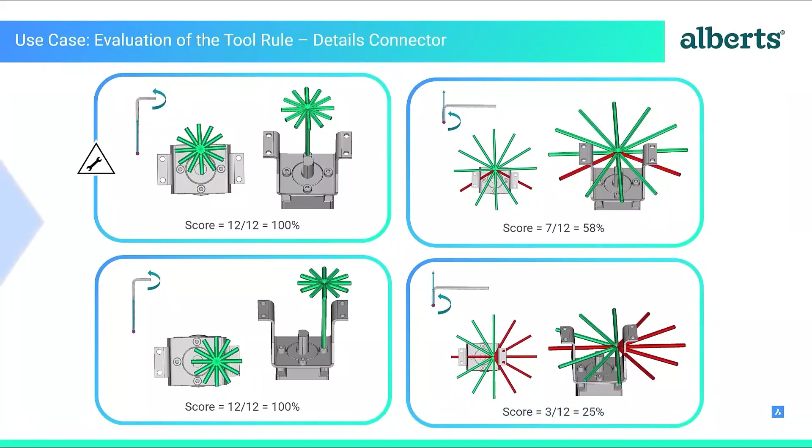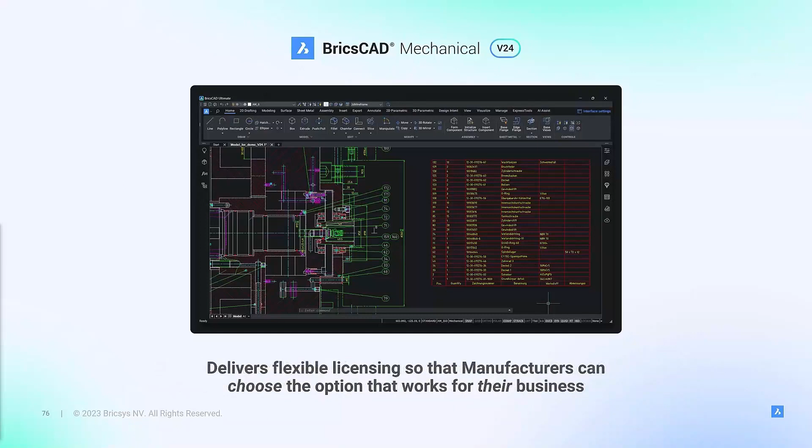BricsCAD Mechanical V24 is the latest example of our continued commitment to deliver professional design and drafting. In this release, we've closed key gaps in functionality between BricsCAD and legacy 2D mechanical CAD. We've also added new capabilities that let non-experts utilize existing 3D models to get their job done. We've done all this and continue to offer the cost savings and licensing flexibility that our clients require. This is a brief overview of the new capabilities of BricsCAD Mechanical V24. To learn more, we invite you to visit us online to explore more detailed demonstrations of the software, or contact our local experts for a personalized demonstration.